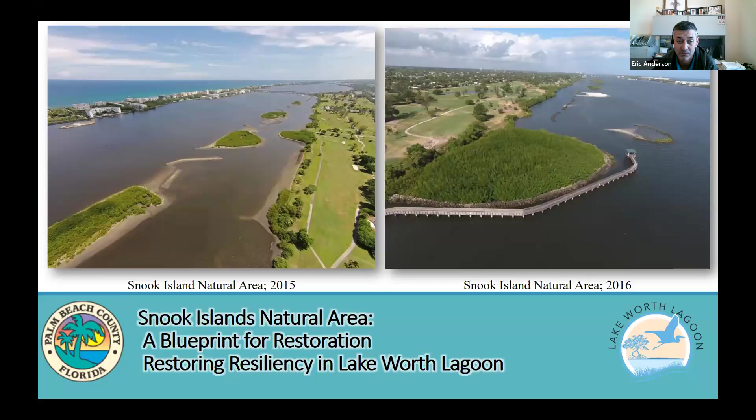Today, Carrie asked me to speak a little bit about Snook Islands. This wasn't the beginning for Palm Beach County and restoration, but it really has provided us the blueprint for the past 20 years of what we learned at Snook Islands. I'm going to take some of those lessons and share them, and hopefully you guys can envision these types of projects in your area.

One story I really want to start with, and I wish I had more time to talk about, is the Lake Worth Lagoon American oyster catcher. Their story really began in 2005 upon the completion of Snook Islands. The contractor said, 'We see these birds with these big yellow or orange beaks hanging around, we're not sure what's happening.' They were attempting to nest the very first year Snook Islands was completed. The project wasn't designed for coastal bird habitat, but these birds showed us that we provided them habitat with the food and shallow habitat, and their story continues through this day.

We have 4 nesting pairs of these birds on Lake Worth Lagoon restoration projects, and as I said, they're continuing through this day. We have an ongoing restoration project where we got about 20 American oyster catchers hanging out on newly created sand, and the project hasn't even completed yet. 13 of those were banded.

While most of them were banded in Lake Worth Lagoon, there were 2 birds - one banded from Martin County and another from Brevard County. It just shows you how restoration is so important for all of us.

Not only did they have American oyster catchers, but we had black skimmers - about 19 to 20 of them. 4 of them had bands: one from an undetermined location in Florida, 2 from North Carolina banded just this past summer, and 1 Royal Tern from Virginia banded in 2019. So we're all connected by water, we're all connected by habitat, and it's just so important that we create this habitat.

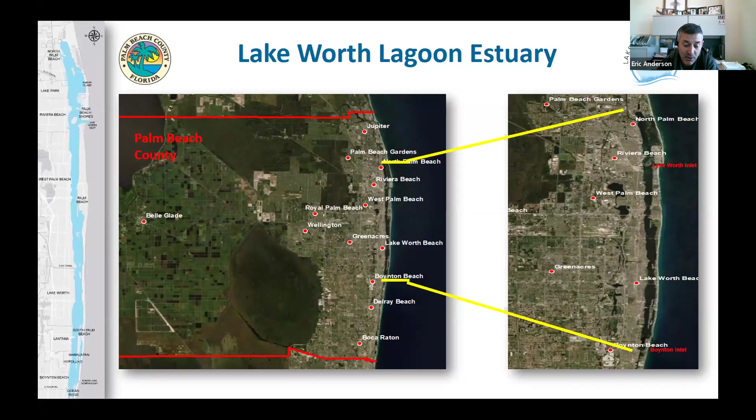The North Inlet Lake Worth is really our primary focus of where we get most of our oceanic water to create the estuarine system. We do have Lake Okeechobee in our northwest corner, but while we do not get a lot of Lake Okeechobee water in Palm Beach County, that mostly goes north to St. Lucie and west to the Caloosahatchee area.

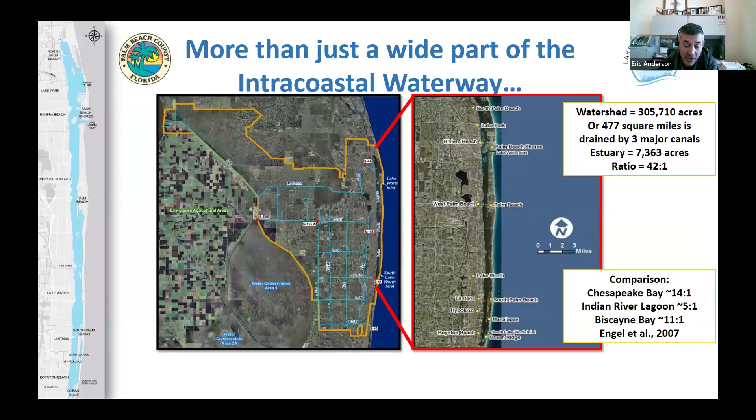We do have a huge watershed, over 477 square miles. As you know, what we do really well in Florida is move water and drain water. So while we don't get a lot of Lake Okeechobee water, our own watershed produces quite enough water, more than we even need.

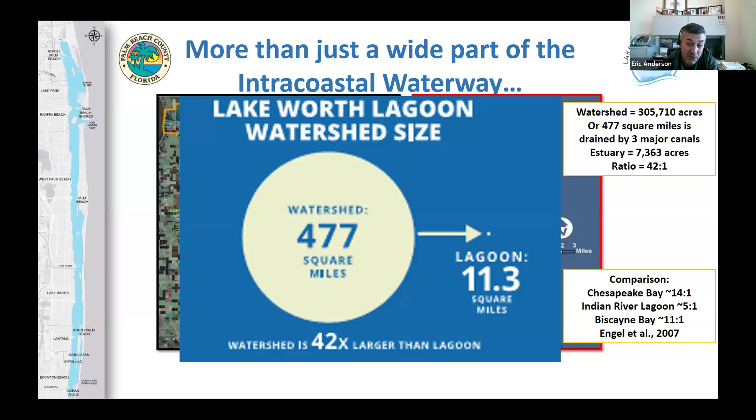If you compare that to other estuaries like Chesapeake Bay, it only has a 14-to-1 ratio, Indian River Lagoon 5-to-1, Biscayne Bay 11-to-1, and Lake Worth Lagoon has a 42-to-1 ratio. So our own watershed is creating some of our own challenges.

We do not have a national estuary program in Lake Worth Lagoon. Lake Worth Lagoon was not a historical estuary—it was originally a freshwater lake. The Indians called it Hypoluxo, meaning water all around.

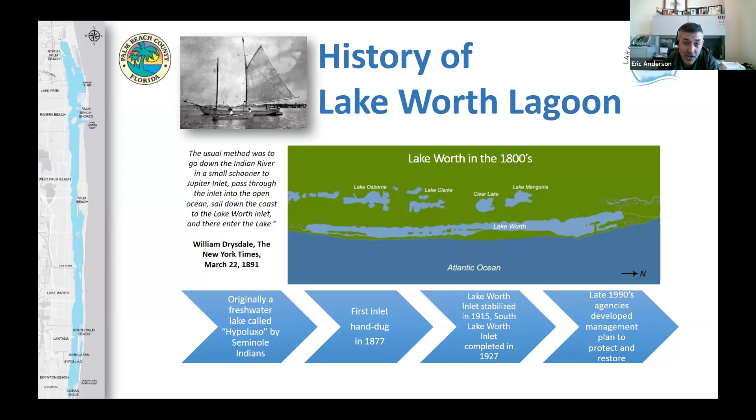So this restoration business is relatively new in protecting our waterways. We've had over 100 years of influences, just like most areas in Florida, whether it's marinas, seawalls being put up, stormwater discharges, or freshwater discharges.

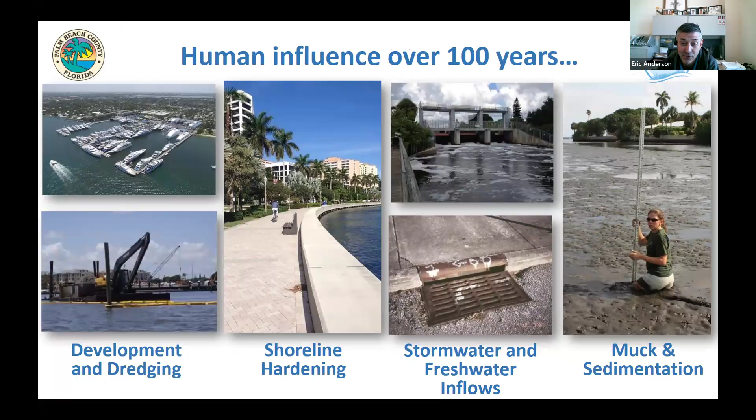In the 50s, the land started to change. We developed our shoreline, put in condos, put in a seawall. In 2003, we did a survey and found over 400 acres of mud just in the central part of the lagoon.

So our goal has been to try to find a way to cap these muds, create habitat, and improve habitat. Just one example of all the sediment that comes with the discharges is on your right here—this is one location where we did a restoration project, capping that mud.

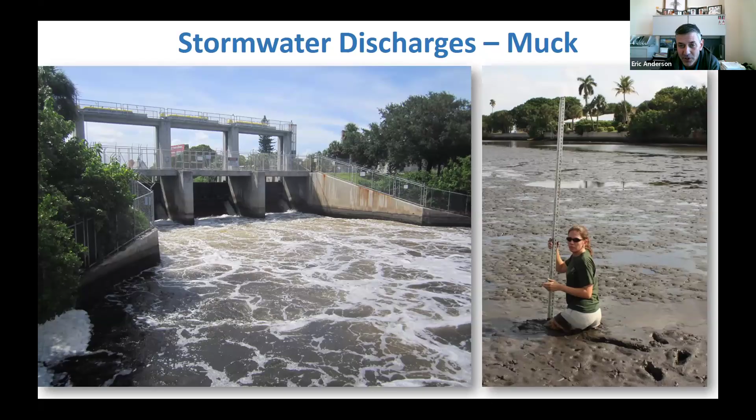Not every location has muck that's exposed at low tide—a lot of it's in those deep dredge holes. Our area has about 70% hardened shoreline, which only leaves 30% natural. So we do have a lot of areas to work on.

In the early 2000s, we did a sediment trap project where we dredged sediment from the C-51 canal before it got into the lagoon. While Lake Worth Lagoon has been taken off the CERP Everglades plan, water storage is always helpful for everybody, whether it's Lake Worth Lagoon, the West Coast, or the northern estuaries.

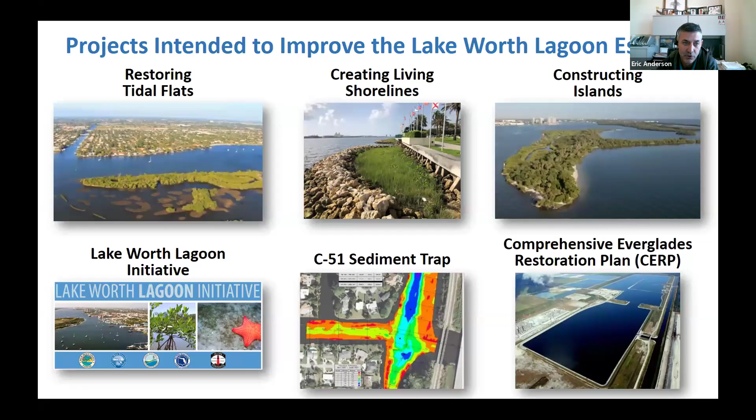Today, I'm going to primarily focus on the restoration tools we used to create habitat, create living shorelines, and restore islands.

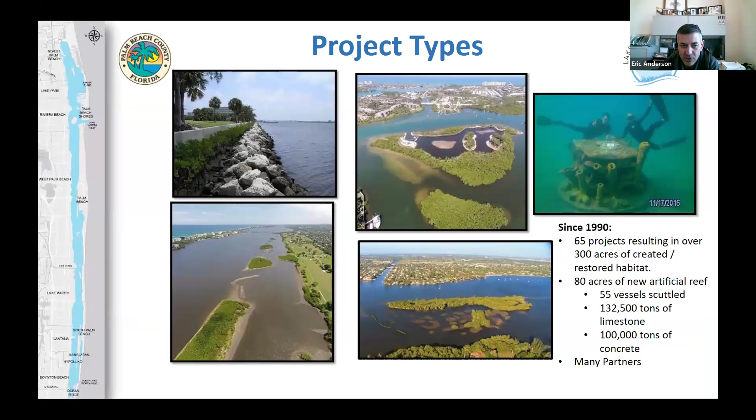The series of tools we've developed includes putting rock in front of seawalls, scraping down islands, an artificial reef program, creating breakwaters and oyster habitat. What I'm going to focus on primarily is building islands.

I always like to start with this slide because you need to find out your past before you move forward. Palm Beach County's restoration history really started in the 1990s with Munyon Island.

We actually reached out to Miami-Dade County—they were doing a lot of this island restoration work. Gary Milano at the time was our inspiration and helped us get into this business.

But it wasn't until we partnered with the Army Corps of Engineers and the state of Florida to construct Munyon Island to create wetlands, removing spoil from this area.

This area used to be, in the 1900s, a location for the rich and elite to come and drink the Pawpaw elixir, which was considered the fountain of youth. While we found some empty bottles, we never drank it. Munyon Island is our fountain of youth, and we realized restoration is an important area for us.

Taking those tools, we've done a series of other islands: Munyon, Johns Island, Fullerton, and most recently Sawfish, utilizing those same tools of scraping down islands and creating habitat.

Upon completion of Munyon Island, we partnered with the Army Corps of Engineers again to develop Peanut Island not only as a county park, but also as a dredge material management site. The Florida Inland Navigation District and the Army Corps were looking at a place to store additional material. However, they needed to take off about 1.2 million cubic yards of material from Peanut Island.

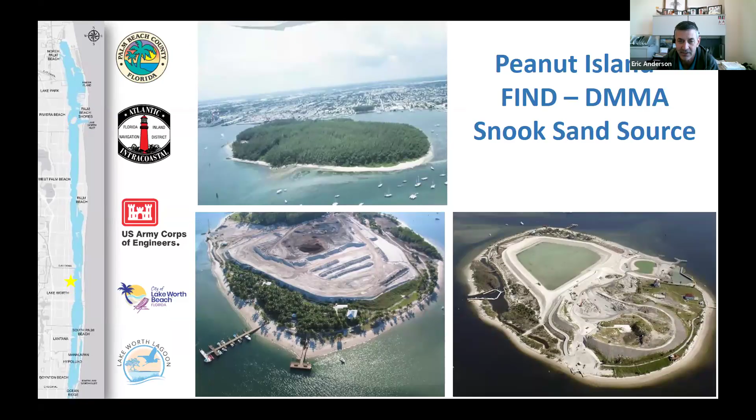Finding a location to take this material, we identified Snook Island, the former Lake Worth Golf Course, which now is called Snook Islands. It was an eroding seawall with a deep dredge hole up to 20 feet deep, with 10 to 15 feet of mud in some areas.

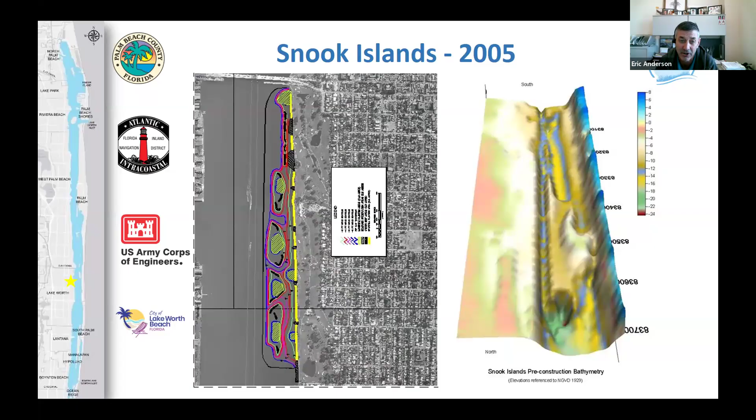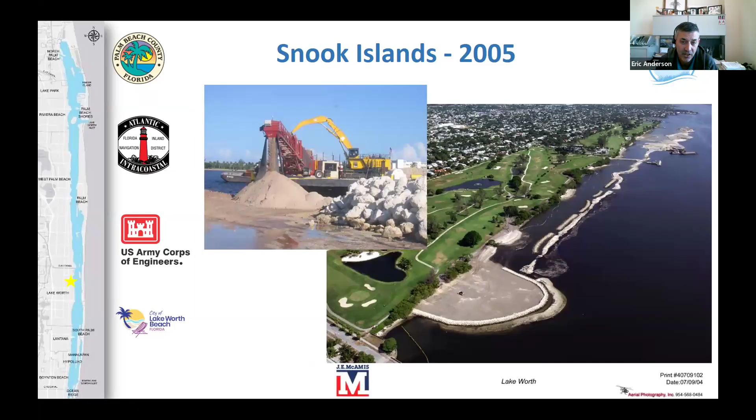The project brought in 1.2 million cubic yards of sand to fill in those muds, cap that mud, and create a true nature-based solution for this shoreline. Rock was implemented to create breakwaters, to reduce wave energy, and to protect the mangroves.

The tools that we learned from Snook Islands are a lot of the tools we've been able to take forward. While Snook Islands was almost a 100-acre restoration site, a lot of the lessons learned about breakwaters and making these mangrove islands is what we've been able to take on and build the rest of our restoration projects.

One interesting thing about Snook Islands is when we originally constructed it, we built a lot of areas with open spaces. As you can see now, those open spaces have closed in and mangroves have grown up. So we do have to do some management activities to keep those open spaces open by removing mangroves and vegetation coming in, to allow visitors to actually see what we've created.

Top left-hand corner, you can see the failing seawall, bring in sand, plant Spartina, a couple of years of Spartina, and now a lot of that Spartina has been outcompeted by mangroves.

In 2014, we partnered with Florida Inland Navigation District and the state of Florida's DOT to construct mitigation for seagrass, mitigation for building bridges. This was the second phase of Snook Islands, building smaller mangrove islands and oyster reefs.

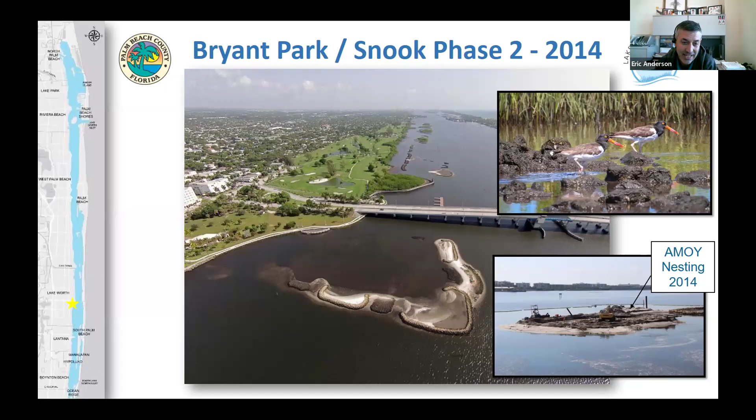This was the first project where, while we were bringing sand, our second pair of American oystercatchers nested on the sand during construction. It made us start thinking it can't just be about oysters, it can't just be about mangroves - we need to consider the birds.

The third phase of Snook Islands included receiving materials of opportunity, beneficial reuse from local marine and dredging projects. We created 2 nesting bird mounds and a mangrove island in an area in between. This was our third pair of birds nesting in Lake Worth Lagoon as a result of this.

We were hoping that the 2 mounds would allow 2 different pairs to nest. Unfortunately, these birds are solitary nesters and they've taken up the whole island.

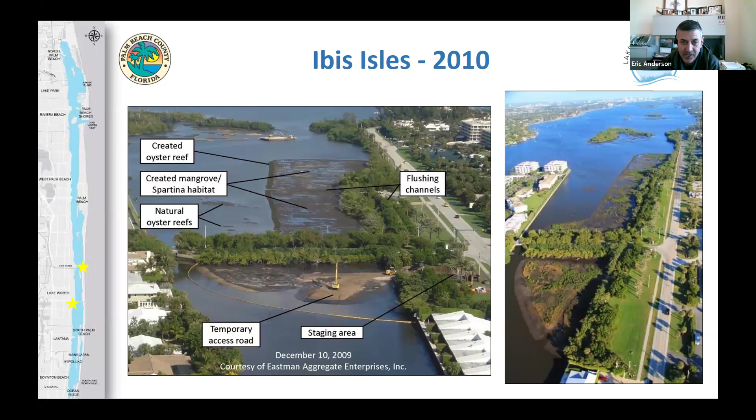Ibis Isles is a location where, remember, the girl was in the mud earlier. This was shallow water mucky habitat that we wanted to cap, and we did cap it to create mangrove, Spartina, and oyster habitat. South Cove in 2012 involved filling in a deep dredge hole.

At Grassy Flats, utilizing the same technology that we used at Ibis, we used a sand shooter, which broadcasted sand over shallow water mucky conditions to create about 12 acres of seagrass habitat and 2 acres of mangrove. This was our first project specifically designed for American oystercatchers to nest.

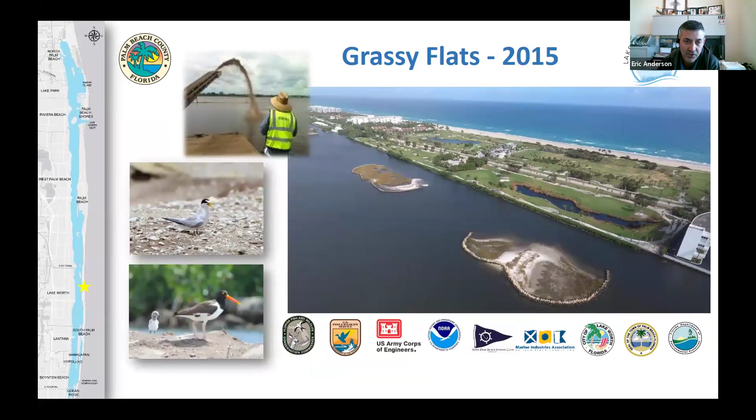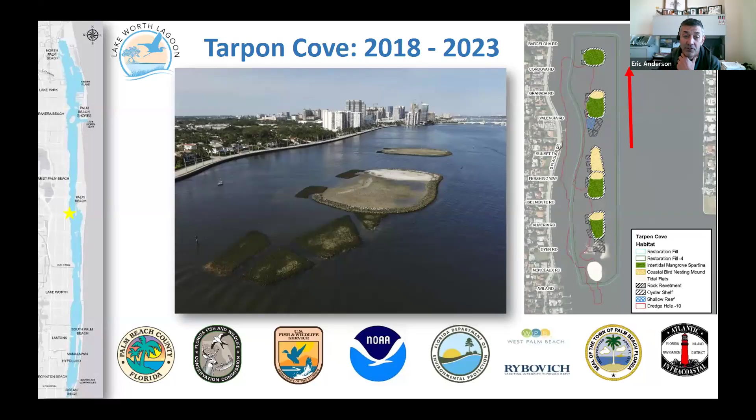Most recently, we just completed Tarpon Cove in downtown West Palm Beach. This project required over 500,000 cubic yards of material, of which 369,000 was beneficial reuse at no cost to the county.

Not only did American oystercatchers nest on this island during construction, we also had 3 years of black skimmers nesting and 2 years of least terns nesting.

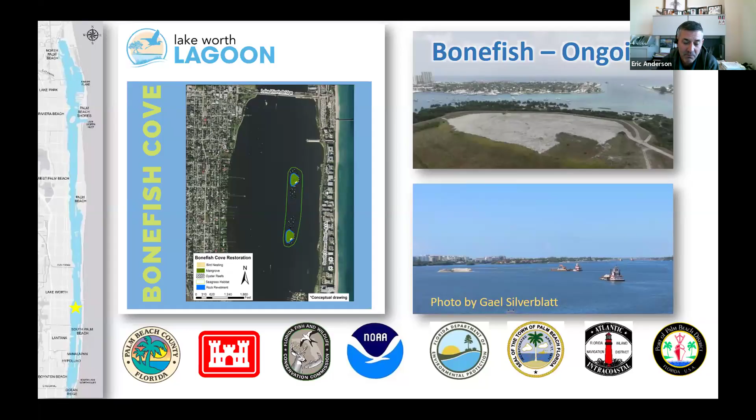I know we're getting close to time here, so I'm just going to run through a couple of the last projects. Our most recent project is Bonefish - I showed you earlier with all those birds utilizing it, similar to Snook Islands and Tarpon, filling in a deep dredge hole to create intertidal habitat.

One lesson that I do want to share, though, is some of these dredge projects require lots of material, and material could be the challenging part for these projects. You need to have a sand source, and the county's done that either through partnering with Florida Inland Navigation District or local marinas. If you could find shallow water locations that do not have resources, those are also bang for your buck.

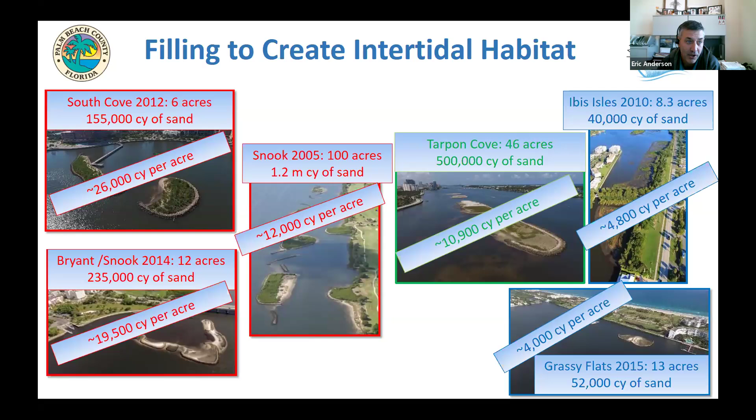So some of the tools that we've used in the toolbox are breakwaters, and I know Thomas and Jenna both talked about these. We have those at Peanut Island. John's Island rock has been great for oyster habitat for us. Breakwaters in front of existing mangroves that have heavy wave energy, Jupiter Ridge and Boynton Beach. John's Island is one of the reasons why we've had such a successful American oyster catchers utilizing it. The rock that we've put out there has created amazing oyster habitat. Highland Beach and Old Bridge Park, again, just breakwaters in front of existing areas.

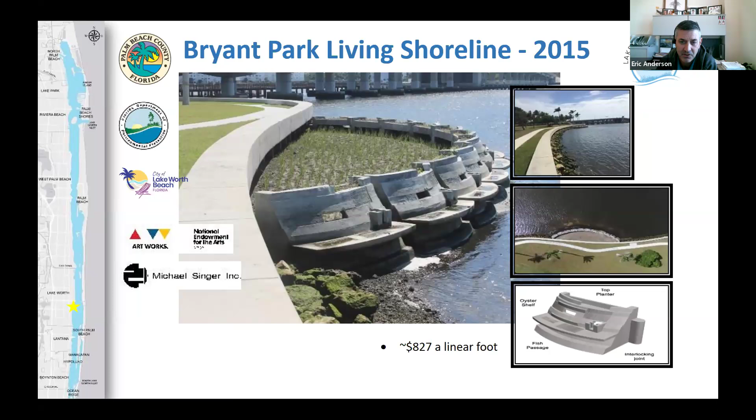Our shoreline planters, putting rock in front of a seawall. Par 3 golf course has not had to have a seawall replaced in 20 years as a result of just adding mangroves and rock. We've dabbled over the years with concrete to concrete culverts at Lantana, artistic prefab structures at Bryant Park, and then just our more typical rock riprap.

All of our projects we plant with Spartina and mangroves. You can see the Spartina lasts for the first couple years, and then eventually the mangroves will outcompete the Spartina and create a green-gray living shoreline.

So I believe that's all the time I have. I do appreciate you guys listening today. And if you have any questions, please reach out to me through email, or I'll be around later also to answer any questions.

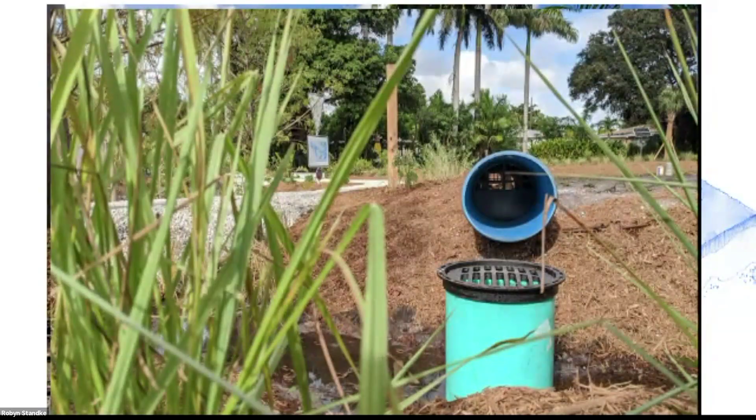The intent of the design was to make the invisible visible. So you'll see this big blue pipe that's normally stuck underground, we wanted it visible. We wanted to utilize a low-tech, solar-driven, above-ground pumping system. You can see that here, so that when the water rises to the top of that conveyance, that pump device, it will automatically pump when this bioswale is full. It will automatically pump it up through the stormwater pipe down into the pond.

So what you'll see is we wanted this above ground infrastructure to not just be a hidden drainage project, but rather one that creates interaction with the users of the park itself.

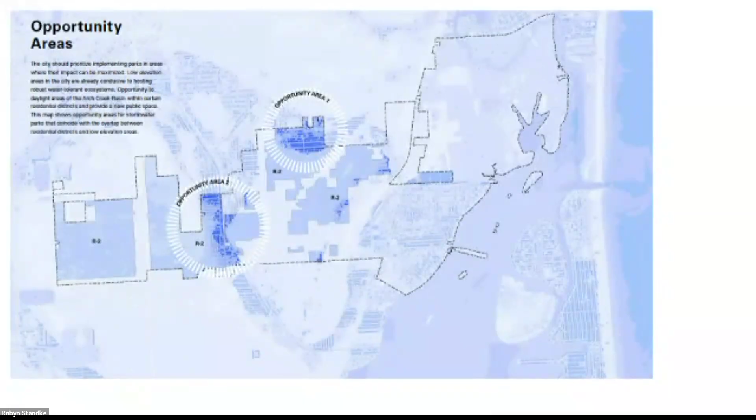Next slide. As noted earlier, part of the project was to resolve how we can duplicate these types of projects throughout the city on our other repetitive loss sites. So we looked at where some other opportunities are. You'll notice that the underlying map here is overlaying that 1840 survey map, so you can still see the slough, but you can also see the parcels. The dark blue parcels we believe are the strongest areas, because they are the deepest part of the slough, for doing more of these types of projects, because we believe that building multiple stormwater parks in the city would have compounding benefits and mitigate the adverse effects of sea level rise.

One of the things that we discovered is the water table in the last 20 years in the city has risen 1.5 feet. We don't have as much of an issue, but South Florida has a real problem with septic tanks, because many of them no longer function since the groundwater has risen so high. That results in lots and lots of flooding—king tide, sunny day flooding, just lots of flooding.

So one of the things we wanted to do is have this plan bolster the city's infrastructure, as well as hopefully our CRS ratings. The parks score within multiple activity areas of FEMA's CRS system, and we believe it has been able to give us some additional points. As we build and implement more of these, we get more points, and of course the entire goal is to improve our rating system.

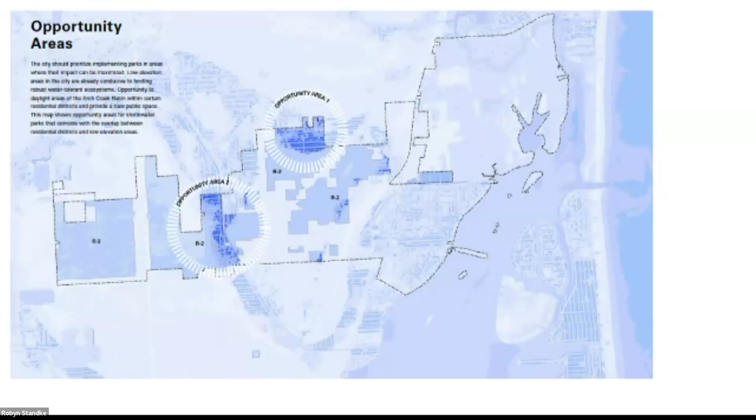So in expanding this network of open spaces, we believe that we wanted the parks to both increase the absorbency, have more native trees and plants back in the urban areas, and protect our groundwater. The third thing we wanted to do was raise environmental awareness and promote community engagement. And the final thing about these stormwater parks we want to share with other jurisdictions and agencies is that they're really easy to do—these are very, very simple.

It required being first out of the gate, and unfortunately first out of the gate oftentimes means that you are struggling and trying to get people to recognize the importance of this. The other thing I wanted to share is that it's really important to have that education component, and to deal with engineers in public works who want to do a typical retention pond.

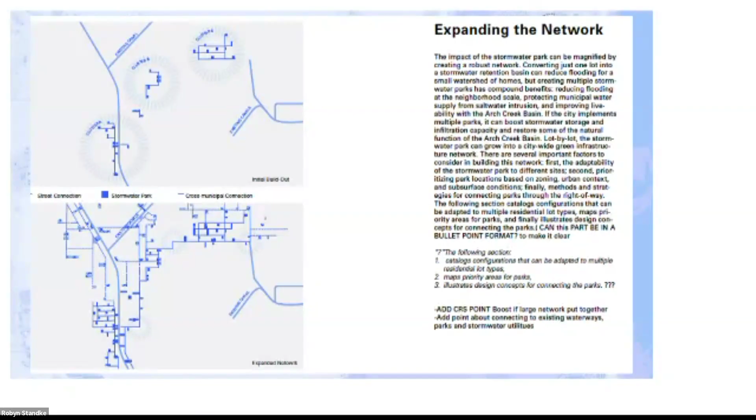Next slide, please. I'm almost finished here. As you can see, the plan has various types of network and lot typologies. Go ahead, next slide.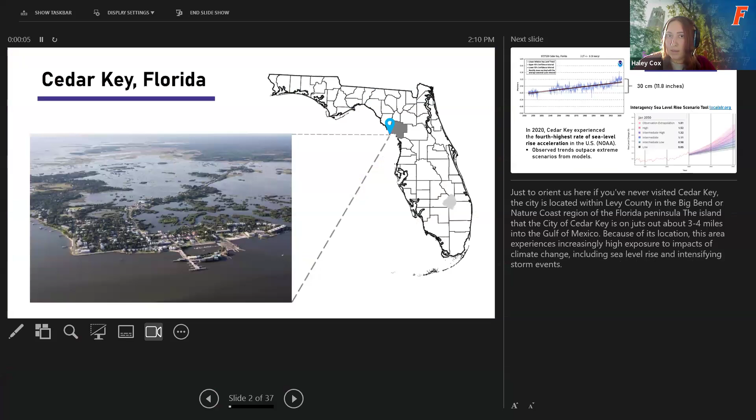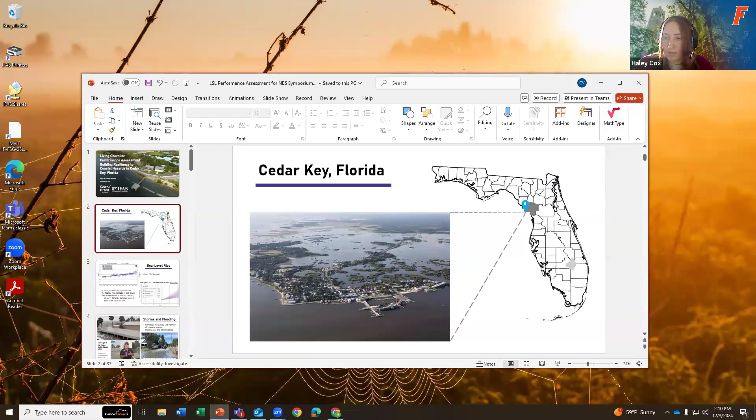Oh, Haley? Yes, I am. Hi, sorry. No, that's great. So why don't you go ahead and share your screen? They're going to work on getting visuals so everyone can see you in just a second here. Hold on just a second. Are you able to share? Oh, there we go. Let's see, we might need to switch to... let me switch the screen around. Honestly, if people can see your notes, it's not the worst thing in the world. All right, this is my battle station. I have like 3 monitors and I never know where we're going. So, perfect, okay, we can see your slides now, excellent.

All right, so hello everyone, thank you for having me today. I'm sorry I couldn't be there in person, but I'm Haley Cox. I'm Florida Sea Grant's Coastal Resilience Coordinator. And I work with our extension agents, our specialists, and other staff to expand some of the work that's already being done to address climate risk in Florida. So my role is focused on developing and delivering extension programs and materials that highlight climate adaptation strategies for vulnerable areas of the state.

And so today I'm going to be discussing how established living shorelines in Cedar Key have functioned as a nature-based approach to reducing coastal hazards, particularly during Hurricane Idalia in 2023.

So just to orient us here, if you've never visited Cedar Key, the city is located within Levy County in the Big Bend, or this Nature Coast region of the Florida Peninsula. And the island that the city of Cedar Key is on juts out about 3 to 4 miles into the Gulf of Mexico. So because of its location, this area experiences increasingly high exposure to impacts of climate change, including sea level rise and intensifying storm events.

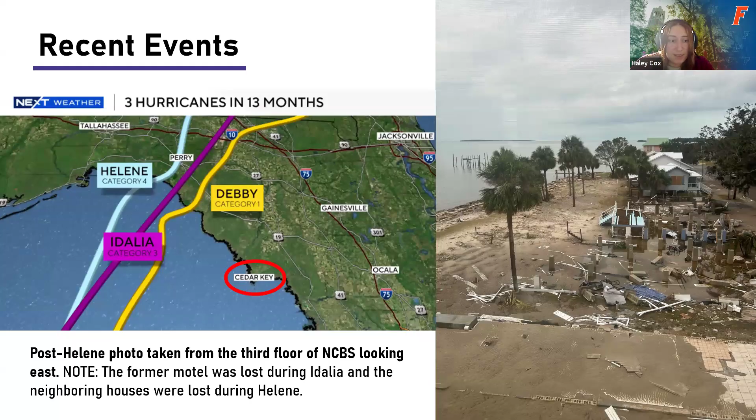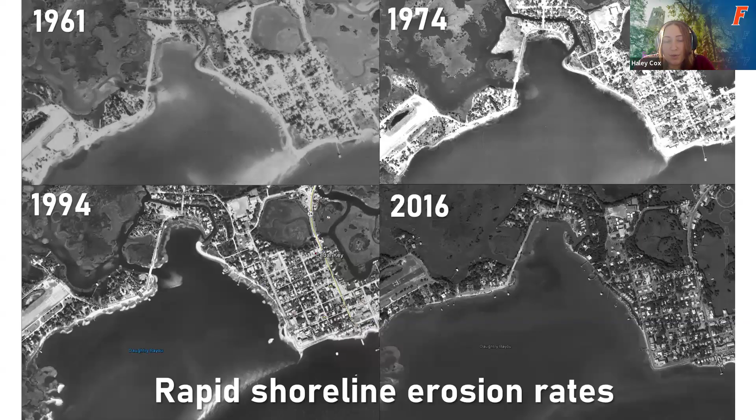So this compound threat of sea level rise, coastal flooding, and storm impacts also contributes to the rapid shoreline retreat that we've observed in Cedar Key over the last 50 to 60 years. This is an area called Daughtry Bayou. These aerial images document this really noticeable shift from sandy beaches with vegetated dunes to skinny shorelines that now abut road infrastructure and residential property.

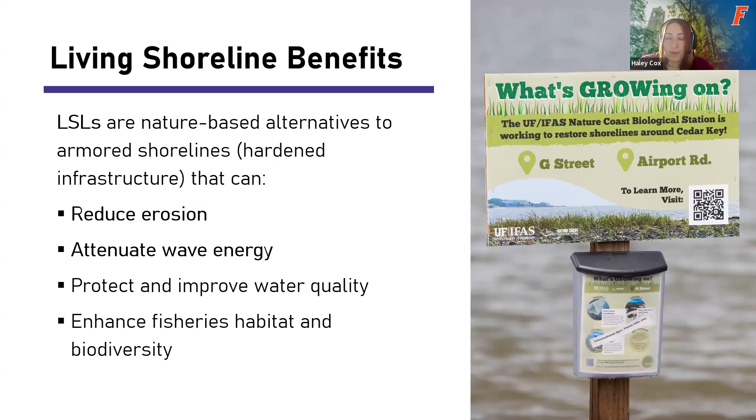Shoreline management practices in Daughtry Bayou and elsewhere in Cedar Key now utilize nature-based solutions in the form of living shoreline construction. I don't need to extol the benefits of living shorelines, but they do provide a variety of ecosystem services. I'm going to focus on 2 of the benefits that have been most impactful in Cedar Key. The projects I'll reference were designed to reduce incoming wave energy and erosion in order to protect existing infrastructure, such as major roadways. All of these projects are essentially retrofit designs installed along shorelines that had some form of existing armoring. The funding sources for the Daughtry Bayou Living Shoreline projects include federal and state funds from the US EPA, FDEP, as well as FWC.

I'm going to move us through this section quickly so that we can really talk about hurricane impacts, but I would be happy to provide additional resources that go into more detail about the design and construction of these projects.

Joe Raines, pictured here, is Cedar Key's first living shoreline project. It was completed in 2017. Unlike the next, Airport Road and G Street, this project involved dredging to restore pre-sedimentation hydrology to a canal that's still utilized by clam farmers. This dredge spoil was spread before the shoreline was planted. And a groin structure, which you can see in the bottom picture, was created using huge sandbags called Titan tubes to keep the canal open and allow for continuous tidal flushing.

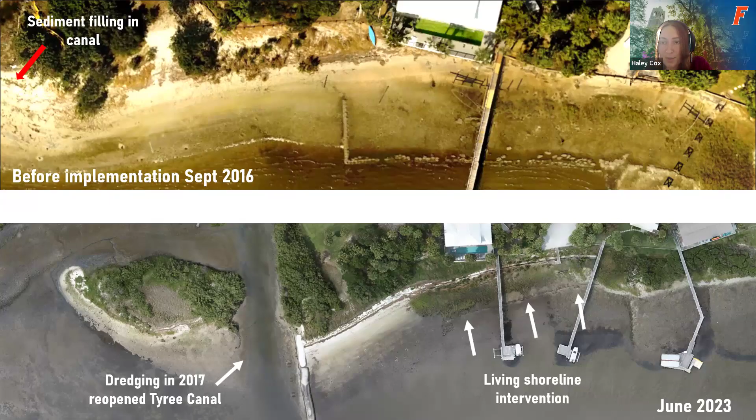Since implementation, the previously failing bulkhead in front of the homes pictured here has remained intact throughout numerous storm impacts over the years, and the vegetation had plenty of time to establish. It hasn't been significantly impacted either. We have seen a bit of a shift in the community composition, though, as mangroves have started to naturally recruit along the shoreline.

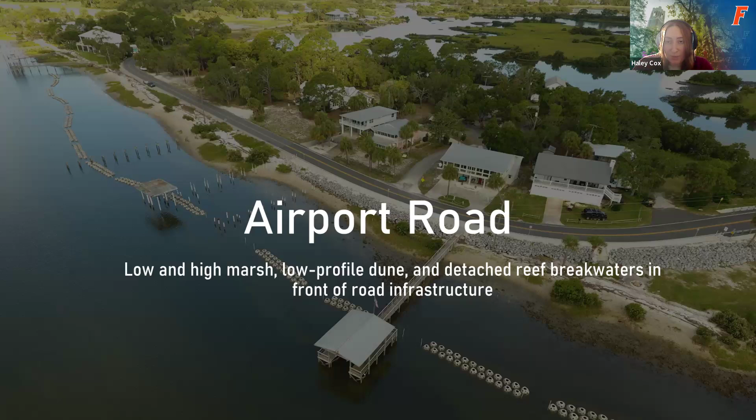This is Airport Road, Cedar Key's largest shoreline project to date. It's of critical importance because the road behind the shoreline has been severely damaged in the past by previous storms, notably Hurricane Hermine in 2016. The primary goal of this project was to ensure the road was not going to continuously be undermined by erosion, and hopefully it would be in better shape to withstand future storm events. I'm happy to report that the road did not sustain any damage during Idalia or Debby, and only a very small section outside the project area was impacted during Helene.

In these pictures, you can see one of the unique features along Airport Road: 16 artificial reef structures created using over 300 pallet-sized reef balls that were deployed by a barge. These have been serving as breakwaters since they were installed in 2020. They provide substrate for oyster settling, and they also help attenuate wave energy.

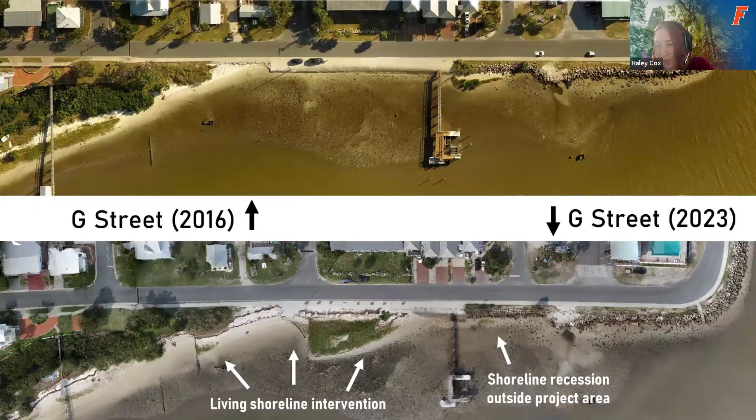So speaking of green, prior to Hurricane Idalia, the extent of the vegetation cover at the Airport Road and G Street shorelines had been increasing since implementation. However, coverage has decreased a bit after these repeated storm impacts, primarily in the higher elevation zones at Airport Road.

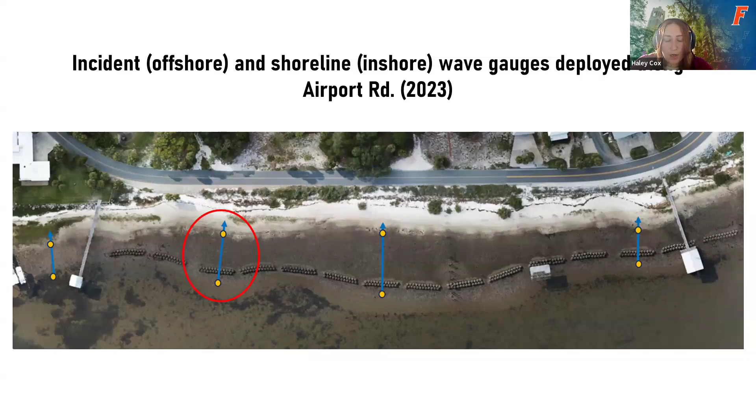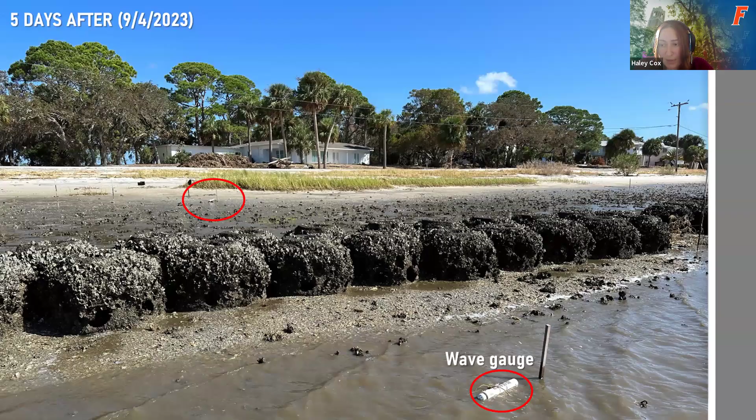So on to the good stuff, wave attenuation. Ahead of Hurricane Idalia, Mark Clark in the Soil, Water, and Ecosystem Sciences Department at UF was able to deploy 23 wave gauges along Airport Road and G Street. The deployment sites also included areas outside the project zone, so we would have a hardened reference point available to us. In this picture you get a better idea of the placement, and you can see what the exposed reef balls look like at low tide. So we have an inshore gauge and an offshore gauge that was placed outside of the influence of any of the breakwaters.

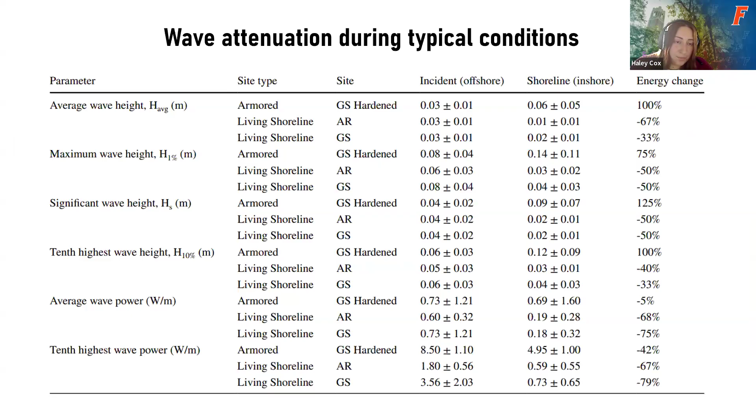This table shows the incident and shoreline wave climate and attenuation during conditions leading up to Hurricane Idalia as recorded by those offshore and inshore gauges. During typical conditions, we see that wave energy reduction in the living shoreline zones ranged from about 33 to 79%. Then this table shows values recorded during the storm, and the living shorelines reduced maximum wave heights by up to 28% in certain areas along G Street. There are a few other things to note that's not captured in this table, but the maximum wave height along the armored shoreline was 17% higher compared to what it was in the G Street living shoreline.

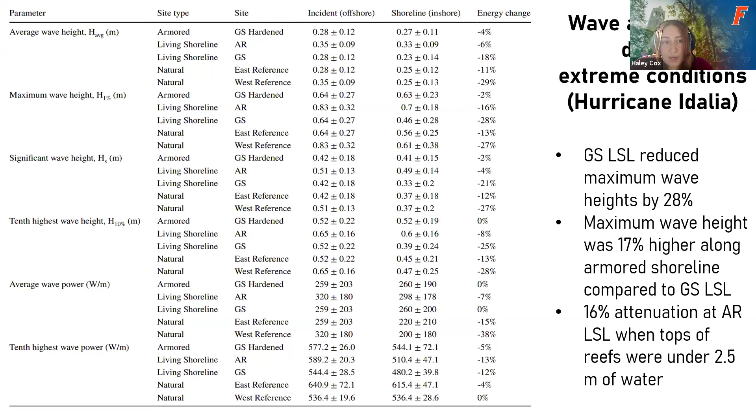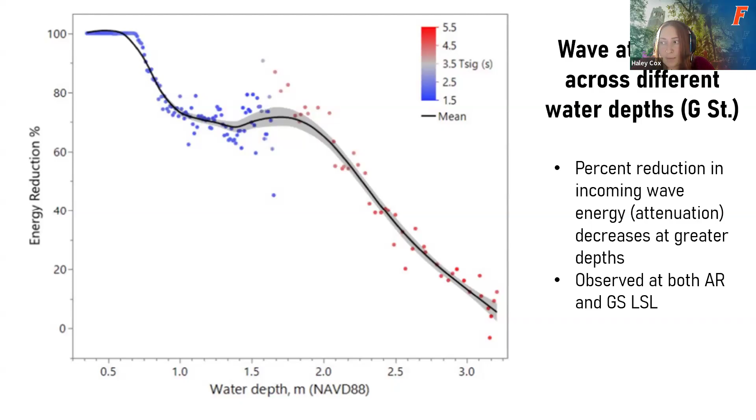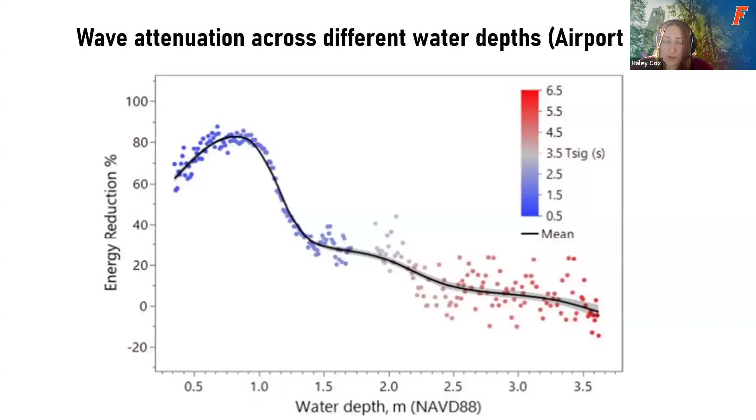We also see some interesting data here with wave attenuation being expressed as the percentage reduction in incoming wave energy, measured across different water depths. The black line represents the mean energy reduction values, the gray shading is the confidence of fit, and the color of the points represents the average significant wave period - warmer colors are longer wave periods, taller waves, deeper water. So the percent reduction in incoming wave energy does decrease at greater depths, go figure. But something interesting along Airport Road - we did notice that wave energy was still being reduced by up to 16%, even when the tops of those reef structures were under about 2.5 meters of water, which was surprising to see.

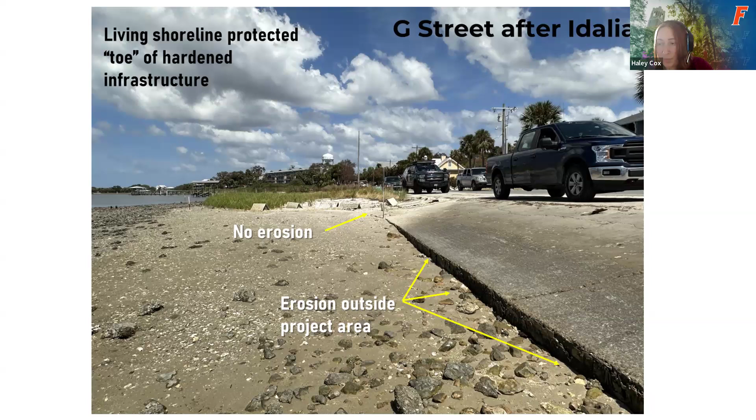This is that same section of G Street after Hurricane Idalia, and we're still noticing the same phenomenon where the area outside the project footprint is still experiencing the effects of ongoing erosion.

I just wanted to show this image again and point out some of the sediment accretion that we've seen around the reef balls in that lower intertidal zone on Airport Road. This has been a slow buildup over time. It's good to see.

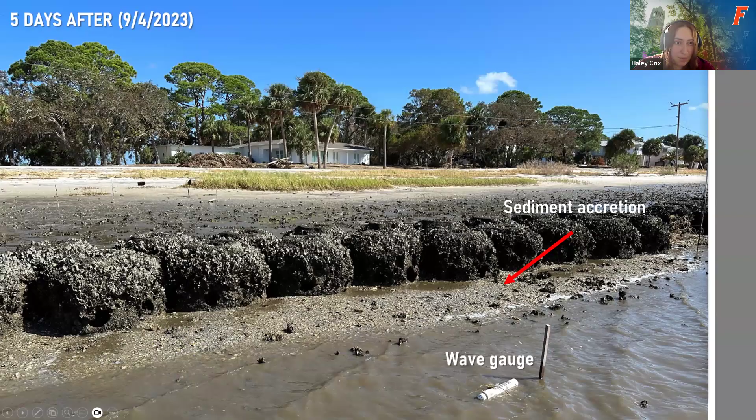Overall, I think we've had great success building ties to the Cedar Key community. These projects have really opened the door for discussions about nature-based solutions, even different types of nature-based solutions. We're working on some projects that are more focused on stormwater now. Great to see that.

All of the shorelines have weathered multiple storms now with minimal losses of sediment and vegetation, and they have successfully sheltered the infrastructure behind them, which was the goal. So we came away with some data that suggests these types of shoreline interventions do provide some level of protection during extreme events, in addition to typical conditions, which again, love to see that.

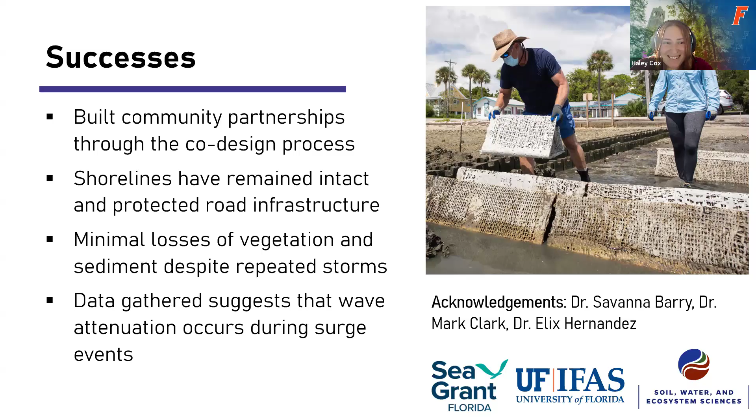So we also need to do our best to manage expectations. I can't claim that a living shoreline is going to stop storm surge or somehow prevent flooding during an event as extreme as Hurricane Helene. But these projects were never designed to do that.

We're still in the process of reviewing some of the wave attenuation data from Hurricane Helene, but I can say that the attenuation values I've seen so far are less, which is to be expected. It was a much more extreme event.

In addition to these more recent events, a few tropical storms that occurred immediately after planting did contribute to the loss of elevation and vegetation, especially in the high marsh along Airport Road. So it does make that establishment period a bit more difficult, and subsequently, projects can struggle after the fact.

Another thing to note, if you are a living shoreline purist, you may not even consider these projects up to snuff, because they are going to struggle to adapt to sea level rise due to that coastal habitat squeeze, where they're installed directly in front of road infrastructure. They can't migrate inland.

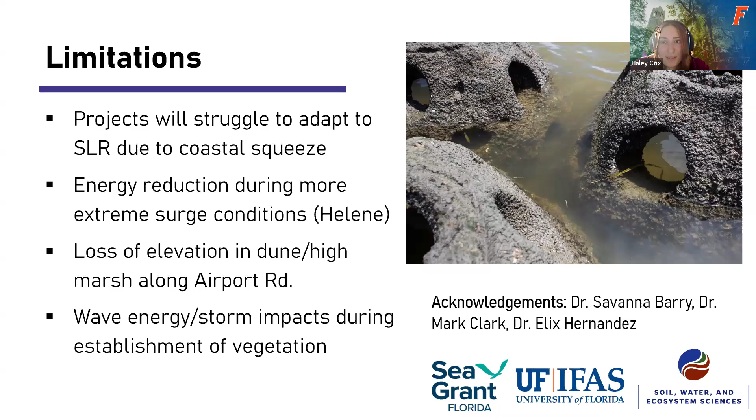But I think the Cedar Key community has been really on it as far as what they want out of these projects, and it is understood that this is kind of just buying time for them to make other adjustments that will be needed in the future.

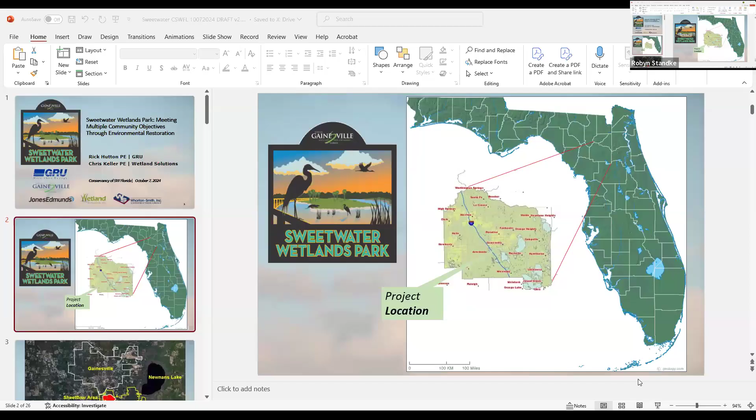Rick, can you hear us right now? I can hear you, can you hear me? Yep, all right, very good. Yep, we can see you, and you should be able to share your slides. Okay. We enjoy your sewage overflow area sign in the background, by the way. Oh yeah, well, I still have some Halloween decorations there. Can you see the slide deck? Let me try something different, sorry about that. No worries. Here we go, how about now? Oh wait a minute, one more try, okay. Yep, okay, it looks like we can see your slides. When Chris goes, he'll give you verbal cues to move through slides when he's presenting. Okay, very good, all right, great, thanks.

All right, okay, so you see my presentation. Okay.

So I'm going to talk to you about our Sweetwater Wetlands Park, and I'm going to present half of it, and Chris is going to present some more of the details. I'm going to give you a little bit of background of it.

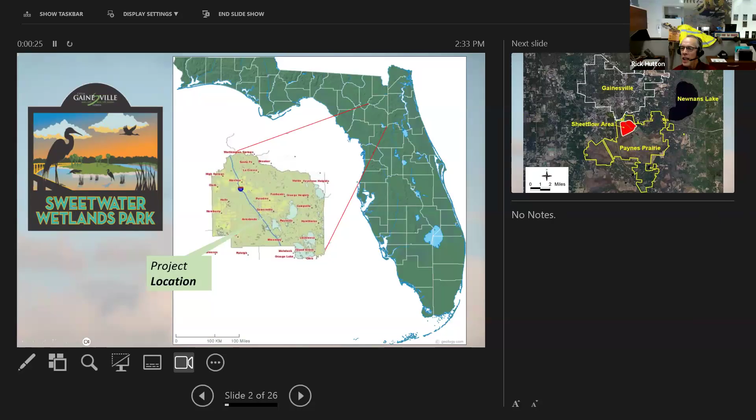So our project is located in north central Florida in Alachua County, just south of Gainesville. And I'm going to zoom in a little closer to the project area.

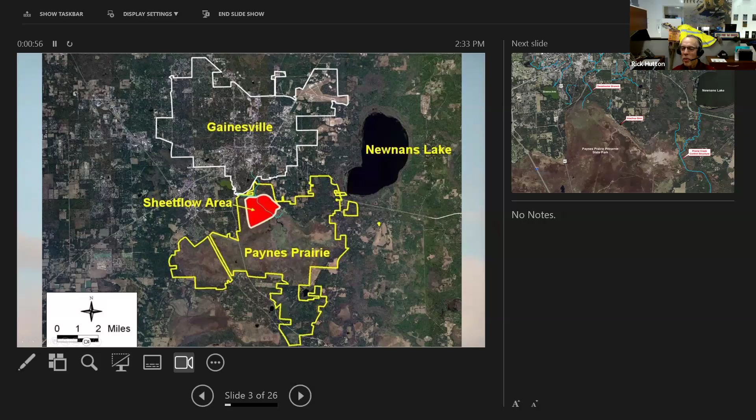So I don't know if you all are familiar with Paynes Prairie Preserve State Park. It is a 21,000 acre state park. It is essentially a wet prairie. It's located directly south of the city of Gainesville, and our project area is primarily located in the northern lobe of Paynes Prairie, more or less where the state park meets the urban Gainesville area.

So this aerial photo was taken prior to our project, and I want to give you a little background. Sweetwater Branch is a creek that flows through what is now urban Gainesville. A lot of that was developed, most of it prior to the 1980s, so older development. In its natural state, it flowed out onto the prairie in more or less a sheet flow pattern, which provided an important water source for the prairie.

In this natural state, the prairie actually receives flow from a number of different sources. It's a wet prairie, but the hydrology can vary significantly depending on weather patterns. The prairie is connected to the Floridan aquifer via a sinkhole located at Alachua Sink. There's a 4-acre lake there that overflows into the sinkhole, and depending on the levels in the Floridan aquifer and how much rainfall we're getting, sometimes the prairie can be very dry, like in this photo. Other times it can be almost a lake.

A number of things have happened over the years compared to its natural state. One, which you can see in this photo, is that ranchers who used to own the land dug ditches throughout the prairie, and one of them was connected to Sweetwater Branch directly to Alachua Sink. The purpose of that ditch was to drain the prairie to make it more suitable for cattle ranching. You can see some other ditches elsewhere in the prairie. One of the objectives of the Park Service, who manages the state park, is to try to eliminate as many of those ditches as they can.

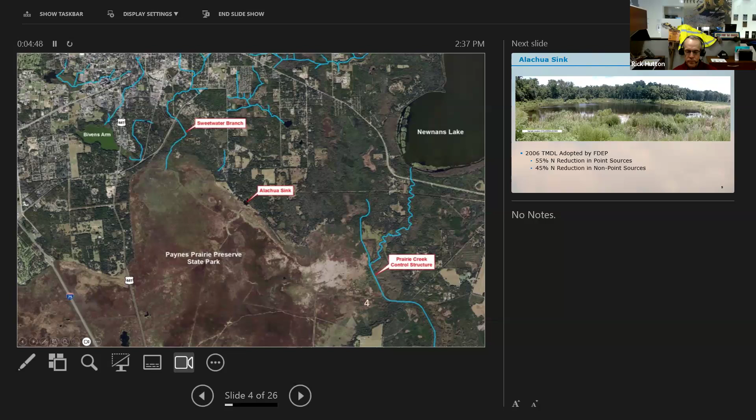Additionally, Gainesville Regional Utilities operates a water reclamation facility that discharges directly into Sweetwater Branch. Although that plant has been upgraded and is in the process of getting upgraded again now, it was still a pretty substantial source of nutrients coming into Sweetwater Branch, with all those nutrients flowing into Alachua Sink. So I've mentioned multiple issues: the nutrients, the sediment depositing from stormwater, trash from stormwater, and also the fact that this area was being starved of its natural hydrology. That gives you a little background.

So in 2006, Alachua Sink, here's a close-up of that 4-acre lake I was talking about, was listed by the state as an impaired water. Some lingo I'll throw at you: there was a total maximum daily load, a TMDL, set for that water body, which basically required all sources of nitrogen to be reduced. It required point sources such as our Main Street plant to reduce nitrogen by 55%, and also required a 45% reduction in non-point sources. So a pretty substantial reduction was required.

Through this process that the DEP runs, called the BMAP, Basin Management Action Plan process, we all looked at how to meet the regulatory requirements, these reductions, and ultimately came up with a comprehensive solution that not only solves the problem for GRU and our water reclamation facility, but also solves it for stormwater that is the responsibility of the city, as well as the county and DOT and whatnot. Here's what that solution looked like, and Chris is going to give you a little more detail on what it actually looks like, but this is kind of the concept.

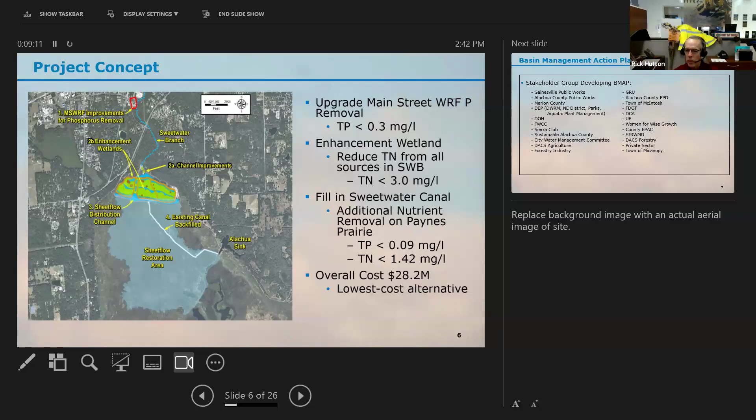I'll acknowledge this Basin Management Action Plan program that DEP runs, in association when a water body is impaired—they go through this BMAP process, as they call it. We really brought together a whole bunch of stakeholders, including government agencies, citizen groups, environmental groups, community leaders, and so on. It was a really big group, but the advantage is that although you have these big meetings with a lot of people, it really enabled us to come up with a comprehensive approach and get buy-in and input from everybody. So I'd say this is sort of a flagship of success of that program.

The project was $28 million total cost. We did get some funding from a number of different partners, including DEP, St. Johns Water Management District, DOT, Florida Wildlife Commission, and Alachua County. They covered about $6 million of that $28 million in cost, which was really helpful.

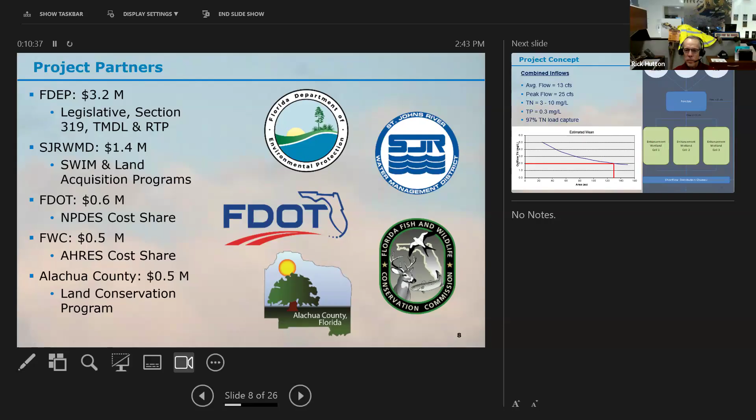This was constructed during the recession, not during modern times where there's been a lot of money available. At that time, it was really hard to get funding, but despite that, we were able to get a fair amount. So I'm going to transition over to Chris and let him talk a bit more about the details.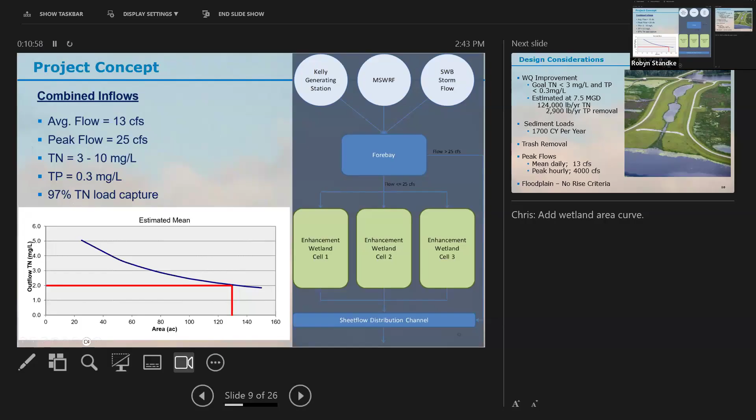So this slide is really showing schematically the project. Uh-oh, Chris, are you able to— I don't hear you. Can you hear me? Hello? Walt's not here, by the way. Are you guys still able to hear me? Yep. No use me talking. Hi Rick, we can hear you. Can somebody in the online audience besides Rick let us know if they can hear Chris? Chris, can you— testing.

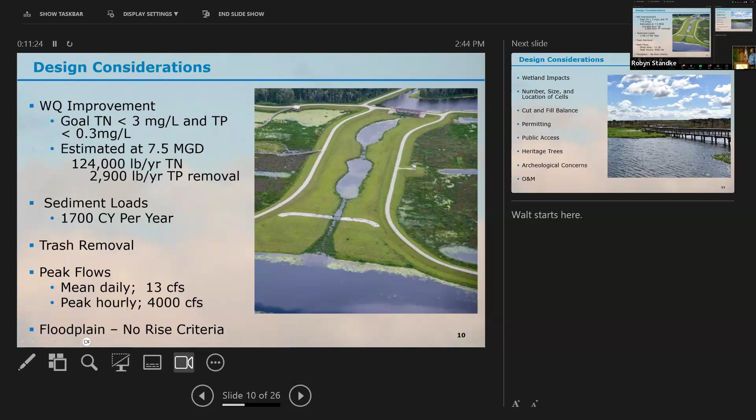We'll try to fly through this as these slides are changing. One thing Rick mentioned is that everything coming to the project comes down Sweetwater Branch, that urbanized stream channel. There are three primary sources of water and water quality constituents. One is the Kelly Generating Station, a smaller power plant in downtown Gainesville. It has a small NPDES discharge into the stream carrying residuals of chemicals used to tackle scaling and other issues in the boilers, so there's some level of pollution that comes with that water.

There's also the discharge from the Main Street Water Reclamation Facility that Rick already talked about, as well as urban storm flow. Rick mentioned the project was situated essentially at the mouth of Sweetwater Branch, where all these flows come together, so it's an inline system that had to deal with highly variable flows and varying water quality over time.

One focus in designing the enhancement cells was the TMDL issue, focusing on nitrogen removal and getting the size of the system correct to achieve the nitrogen reduction goal—not just for GRU, which was a 55% reduction in point source loads, but also for the stormwater utility and their 45% share of the total load that needed to be reduced. So a lot of analysis was done on those three inflow streams, looking at how to best capture that water and what capture efficiency we needed to achieve those goals.

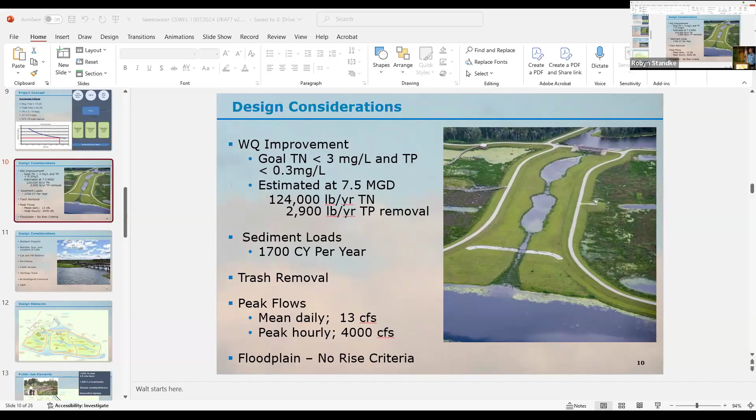So it wasn't just water quality and hydraulics driving the design—there were lots of other things to consider. We were creating a big wetland project but still had to deal with permitting wetland impacts, which was fun. We had to look at the number, size, and location of the wetland cells and how to fit those into the site topography and hydraulic profile, and drive to balance cut and fill so we didn't have to import material for embankments or export and dispose of material off site—that brings construction costs down. We've heard about permitting all day; it was no less easy on this project, and we had to do it at the local, state, and federal level.

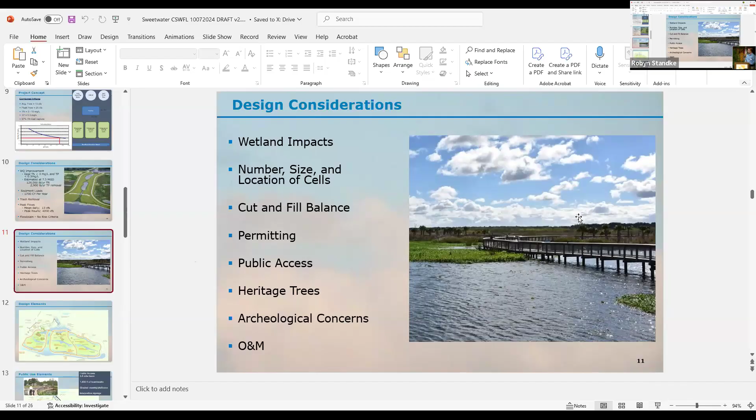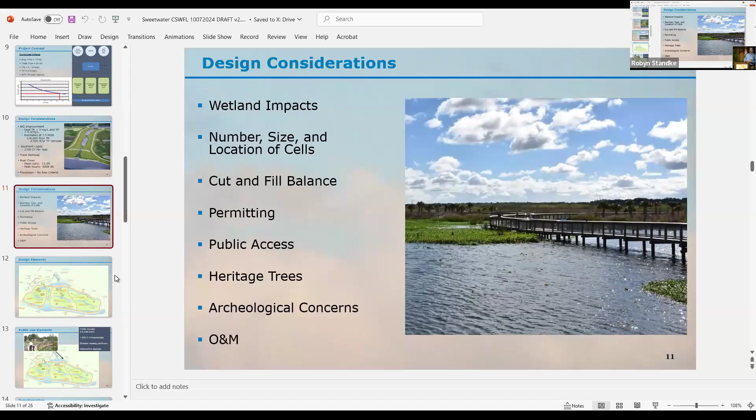There was a big drive from the very beginning and a lot of community stakeholder involvement to really make this publicly accessible. At the county level, we had to deal with heritage trees around the rim of the prairie. We had cultural resources to deal with, and everything had to be left in a condition that was relatively easy to operate and maintain by the city public works staff.

Major design elements at the top there, you can see where Sweetwater Branch comes in. The sediment basins and trash removal systems are there, about the size of a football field. The sediment basin fills up annually. There's infrastructure to allow excavators to go in, a bypass that takes it offline. Excavators can go in, remove that material, landfill it, or use it somewhere else, depending on its chemical nature.

The forebay, the lake feature, is sort of the belt and suspenders to the trash and sediment removal system. It also helps distribute water to the rest of the project, which includes the 3 wetland cells outlined in orange, a forested slough system that comes down through the middle of the leftmost and center cell, a bypass channel that the forested slough serves as, as does this white area around the edge, and everything ultimately connects back into that sheet flow distribution channel that spreads water out and sends it south across Paynes Prairie. It is not a coincidence that this is located in Gainesville and maybe looks like a fairly famous logo.

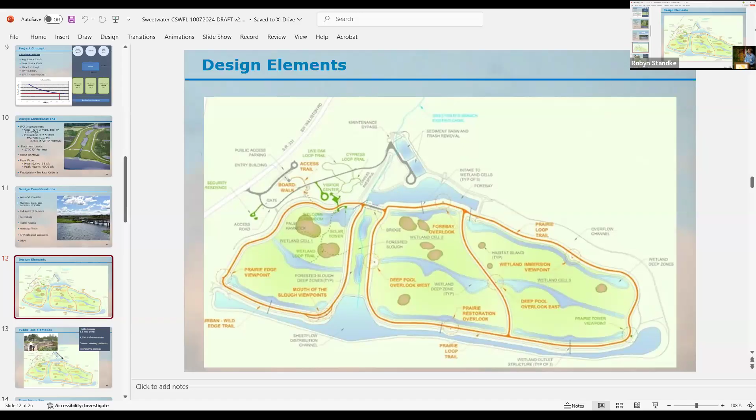So I mentioned public access. Everything in orange here on top is the top of bank surface that is there, and those are all maintenance access, access for the rangers to get around, but they're also public use trails.

So they're covered with crushed gravel. You can walk as little or as far as you want. The public use features are prioritized in cell 1, which is on the west, the left-hand side, so it's a shorter trip for people coming off the parking lot. But if you're feeling ambitious, you can do the entire loop and walk several miles out there. There's also shaded viewing platforms and interpretive signage throughout the project site.

Time to really speed up, we'll go quickly through these. This is Sweetwater Branch coming in. You see that curve where it was really channelized, and shortly out of frame is where it ties into the canal that was backfilled that Rick mentioned.

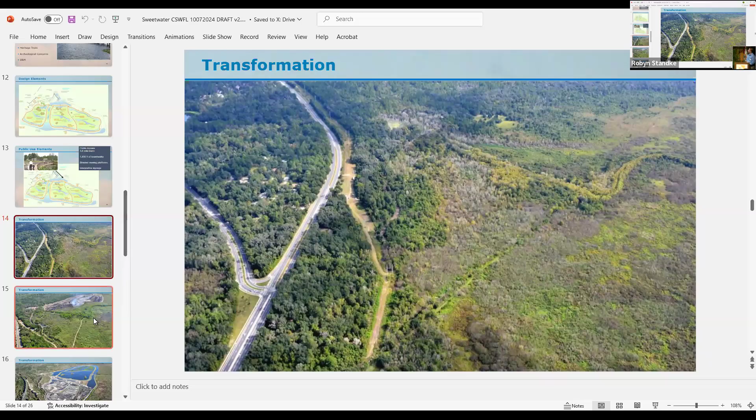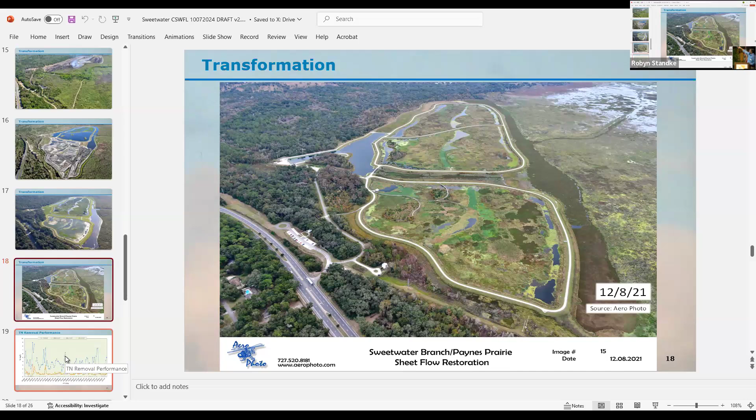Final project done about 6 years after completion of construction. Everything's grown in. You can see the different plant communities, and all those white gravel surfaces are the extent of the public use trails.

Nitrogen performance since the project started up. Blue lines are the inflow concentrations coming in. Those other lines are the outflows from each of the 3 enhancement cells. You see they perform pretty similarly, and on average are well below target. The average is about 1 milligram per liter, Rick said the target was 3, so we're hitting about 1.

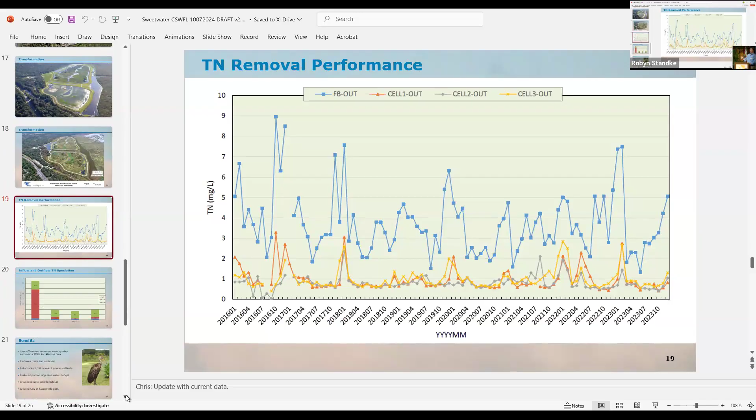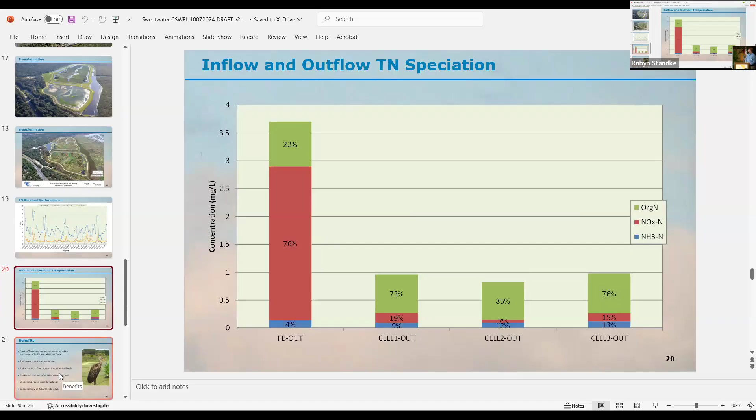Not uncommon in wetland projects for a very nitrate dominated inflow, which is driven by the discharge from the Main Street Water Reclamation Facility. Nitrate is really easily removed in natural treatment systems, particularly in wetlands. You see how the composition changes there. The total nitrogen is again less than 1 milligram per liter coming through the system.

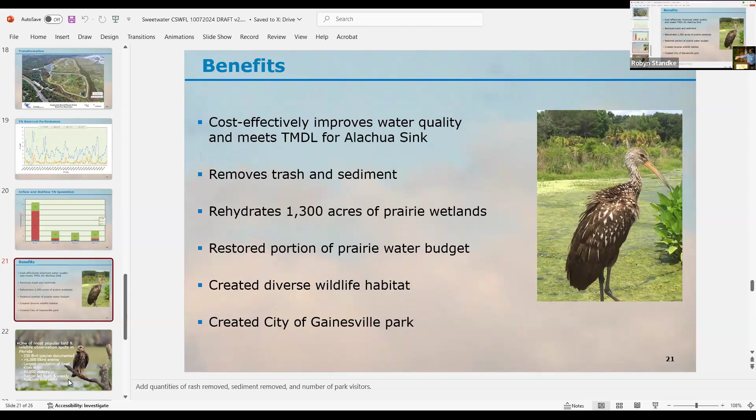Benefits: cost effectively improve water quality and meets the TMDL. We're killing it on meeting the TMDL. Rick mentioned $28 million versus 80 million plus just to deal with the wastewater side of the issue. It removes trash and sediment, rehydrates the prairie, and provides all these other public access amenities.

Somebody mentioned earlier about their stormwater park being one of the birding hotspots. That is also true for Sweetwater. Over 250 bird species documented across more than 6,000 individual entries on eBird. At a time when Lake Okeechobee was having particular issues around the fringe with snail kite nesting habitat, they all moved north and ended up on Paynes Prairie and in the project. For a time, we had over 100 nesting pairs of snail kites, and there are still some hanging around today.

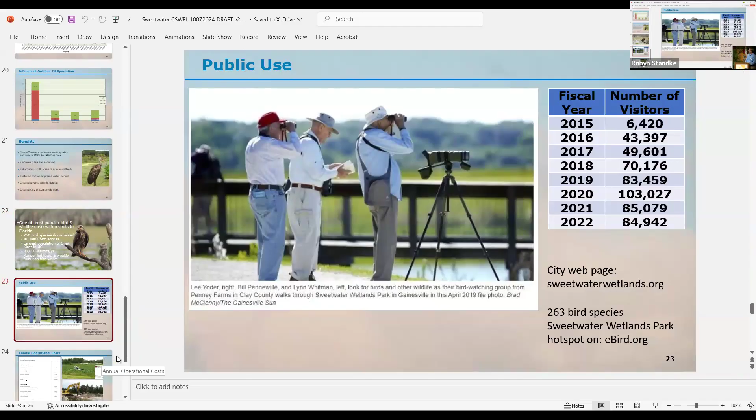Visitation numbers. You see the COVID boom there in 2020 when everybody was trying to get outside, but averaging better than 80,000 people a year.

Next slide. And then just a small text slide on the O&M cost here. About $300,000 a year for the city to operate and maintain this. There are park rangers that are there dawn to dusk as the facility is open. They now have a little shuttle vehicle to go around and get people that have maybe overexerted themselves. There's a certain level of monitoring costs associated with water quality, flows, and hydrology, and then some other ancillary activities with mowing, sediment removal, trash collection, and such.

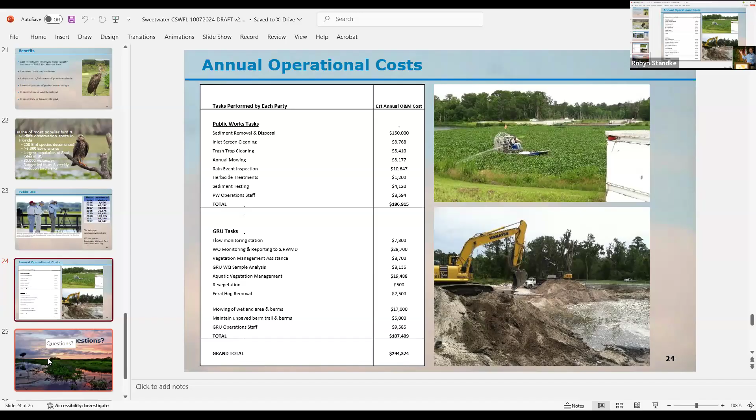So I'll end it there since you told me to wrap up two minutes ago. Okay, so good.